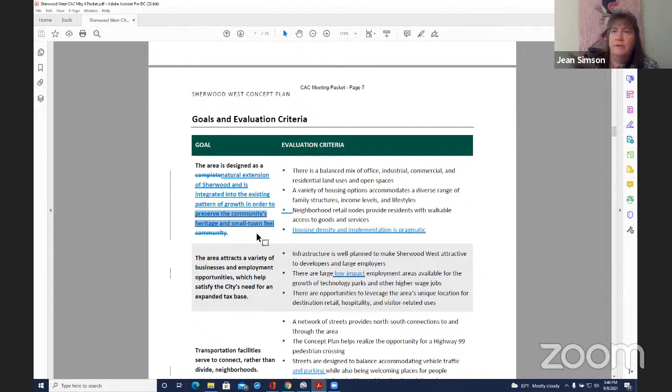And I'm going to circle back to you just for one part of that phrase, view corridors and separation of cities to make something Sherwood unique - our identity or Sherwood's identity unique. Correct, or something more intelligent than what I just put together on the fly. Right, I wouldn't need to see this again to approve it, my opinion. Your staff and crew do a great job of capturing what we're trying to say. But okay, one of the things that came out in our comprehensive plan update was how Sherwood's natural barriers and the separations allow us to be a unique community within the metro area. We're separated by those natural barriers, and preserving that's really important.

Okay. Kennedy, please. Yeah. Hey Joe, I think the vision statement and then the goals and objectives evaluation criteria kind of meets what we were discussing at our last meeting. Okay, thank you. Any other thoughts from anybody?

Not seeing any. Okay, so with the addition that we will find the appropriate phrasing and location for the view corridors and separation of cities to make Sherwood's identity unique as an add, do we have consensus to move this forward as the vision, goals and evaluation criteria? A hand up can do it, either electronic or. Okay. Seeing thumbs up and hands up, not seeing or hearing anything in objection. Okay, all right, then we have consensus on that.

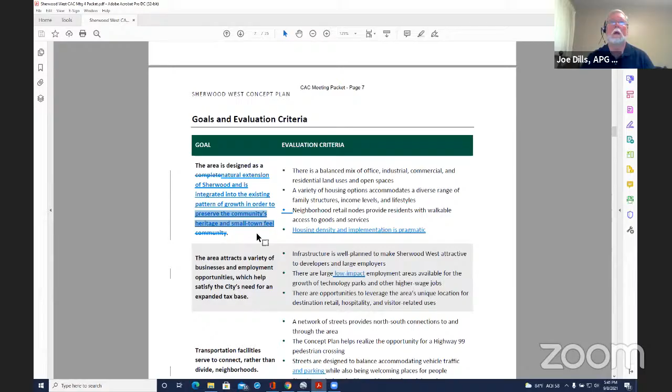And just a look ahead, we have a period of outreach to the community coming up in the next month and a half, and so this is part of the body of work that would be shared with everybody. Okay, very good, good job on that. Let's move ahead to the plan concepts, and bear with me while I scroll some pages.

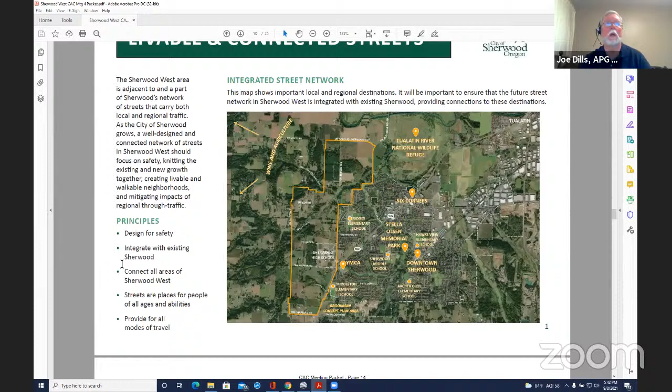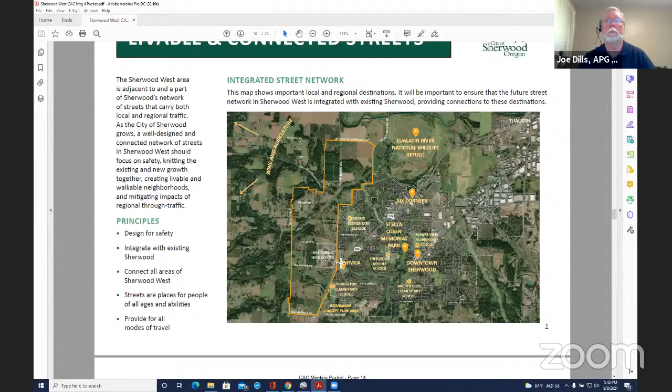So our first topic is livable and connected streets. This is basically the street concept plan. We made this first page in your packet, picking up on the thread of discussion last time, that it's really important that we integrate Sherwood West with Sherwood. Maybe 40 years out, you won't even know the difference between the two. It has really grown together with strong integration. So streets are part of that.

We started with making this map of destinations in the community that we're trying to connect and integrate with. It's not exhaustive - I'm sure there are more things we could add here, but that's the thinking behind this first page.

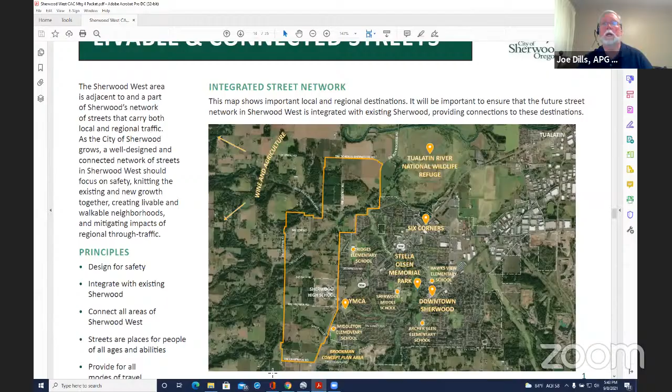So the next page is one of two options for the street plan. The street plan in our context is concept level - there will be refinements as the city moves ahead and adopts things into the comprehensive plan. That's a subsequent step, but we're trying to get it pointed in the right direction, the right balance of vision and implementation at this level. I wanted to walk you through the thinking on this map, and then we'll pause and take discussion area by area.

Starting with the north, our mixed employment discussions to date have identified the potential for a fairly robust area - 200 plus acres of potential mixed employment. To serve those lands, we've put in what I would call a very basic road system. West of Elwert, the connection down from Scholls-Sherwood, the connection over from Roy Rogers, segments the area into about 40-acre blocks.

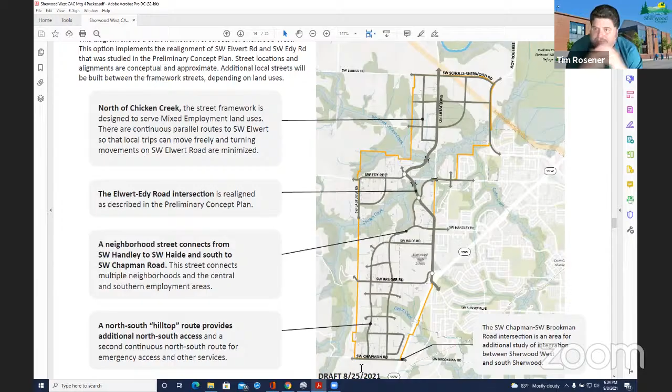My ideal is to keep that through traffic out of our neighborhoods. I think just looking at the terrain, I was wondering if that's possible. That's why I'm trying to figure out through terrain if we're setting ourselves up for that to be built or not. Thank you.

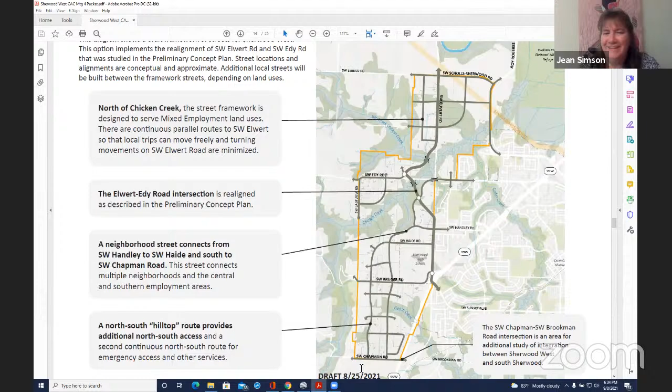Mayor, please. I was just curious about the thought of having a roundabout in another location up at Scholls-Sherwood and Lebeau, at that intersection of Elwert. Is that a possibility too, to keep that traffic flowing, or is that a problem? Carl, I'll ask you to add on, but I would say all options are on the table for up there because it's such a complicated situation that definitely needs some fixing, so a roundabout would be one of the candidates.

Do you agree, Carl? Yeah, I definitely agree. I know the county's had good success at locations like that. It's just that they haven't really come to a long-term solution at that point yet. They've done some short-term things, but there's definitely more thinking to be done there. But I would agree that a roundabout would be an option to consider there. Okay.

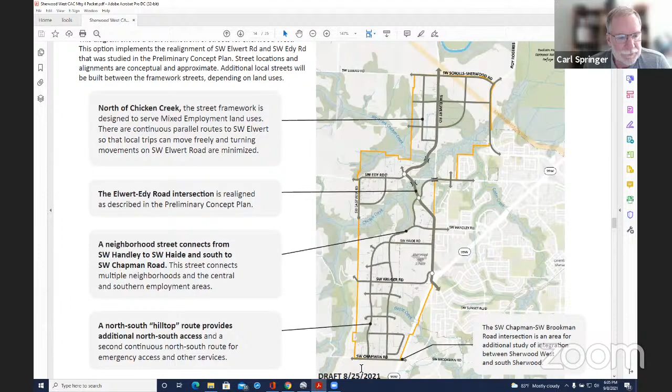Doug, did you have another comment? Yeah, it was more of a question—is the vision that, sorry I can't read it, East View Road, right on the left there that comes—is the vision that it would continue south, or is it just going to dead end there at Chicken Creek?

Our sense is that a dead end is probably the best choice. It would not really merit the crossing given the traffic flow, and the land goes back uphill pretty significantly on the south side of Chicken Creek.

Okay, so the area south of Chicken Creek can be well served by the Haide Kruger kind of framework down there. Yeah, it just feels like we're putting a lot of stress on the roundabout there at, well, it's not named, the realigned intersection of Edy and Elwert, where we have a roundabout, and then potentially even that. Anyway, yeah, I gotcha. Yeah, okay, great comments on this.

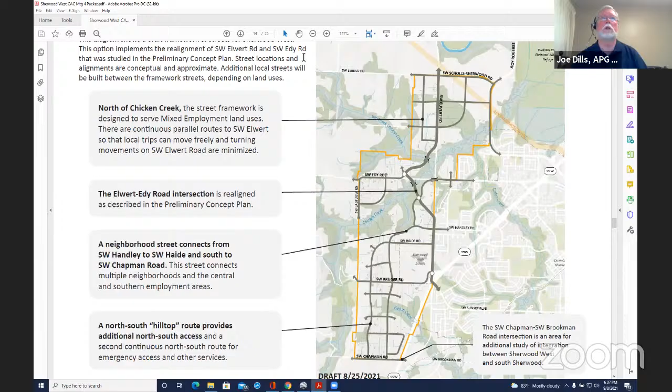Any last ones? Let me move ahead to the other option. There isn't much that's new on it, and I think you've sort of covered your own preference and thinking. But the other option is illustrated on this graphic. The local roads respond to it, and that's what it is—the rest of the system is basically the same.

Okay, let's go Mayor, and then Doug, if you have another one, we'll go back to you. So looking at this map, is the arrow that crosses over Elwert that looks like it's in the new industrial portion, is that Conselman, or what road is that going across there where it says West Fork Chicken Creek?

Let me dial in real quickly. West Fork of Chicken Creek. Yeah, that arrow right there, right where your cursor is now. Is that Conselman? I'm gonna need help on the road name. There is an existing right of way in that location. I believe it is, Mayor. Okay, thank you.

Doug, did you have a comment on this option? Only that I greatly prefer the first option. Okay, I'm seeing some head nods. Is that a pretty pervasive point of view of the committee? Yeah, okay. I think for purposes of sharing our work with the community, we'll continue to show both options, but we can certainly note that there's a preference towards option one at this point. Yeah, I would just really worry about safety in this option. Yep, yeah.

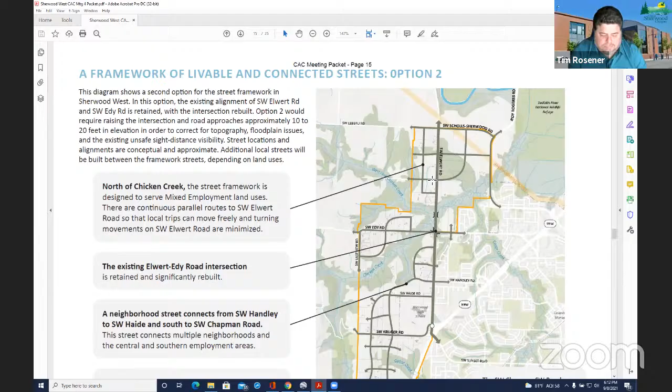Anyway, we captured that as an action item moving forward. Okay.

Okay, to move on to our next topic, the Elwert design. Oh, can I mention one more thing, Joe?

Yes. This came out of our TAC meeting this afternoon regarding roadway design. We talked about this before at our last meeting, that when we design these roadways in these natural areas, we want to be really concerned with how they function with that system. So maybe we have a large box culvert of some type that creates an access way for animals, and also maybe people through the trail system.

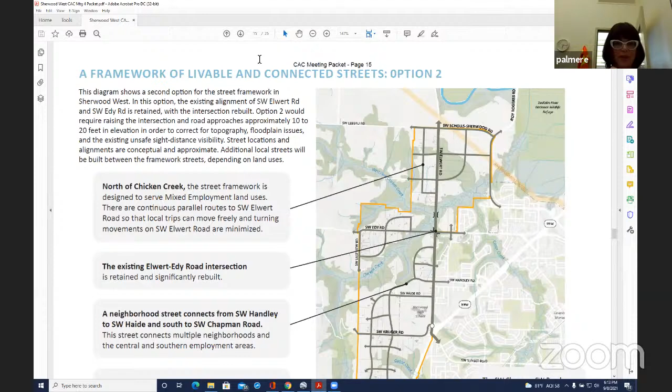Yeah, and sometimes a bridge is about the same cost as a large box culvert, and it actually provides a place for people to go and view the creek, and it's kind of a mini destination.

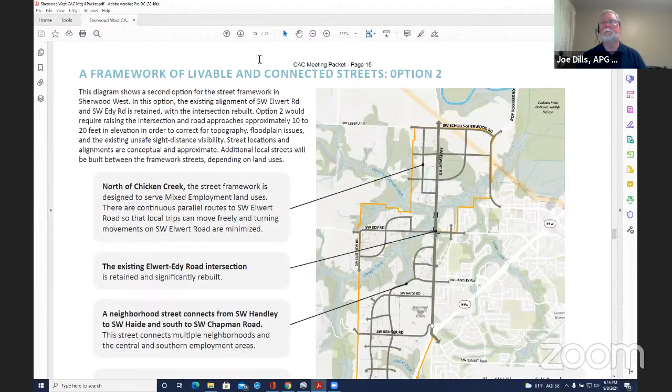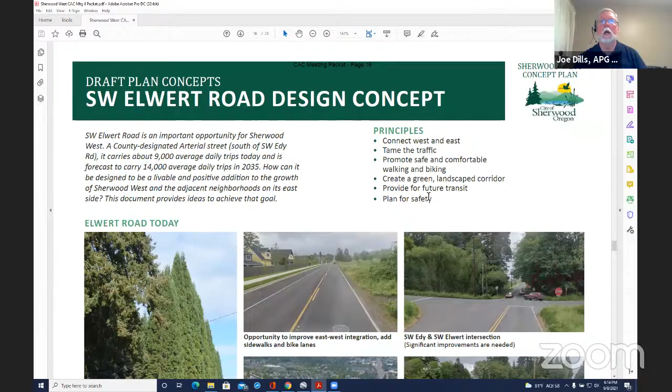Okay, moving on to another transportation topic. We have put some thought into the design concepts for Elwert, and the work here started with just some reminders on the existing setting that is out there. So that's what this page of photos is all about.

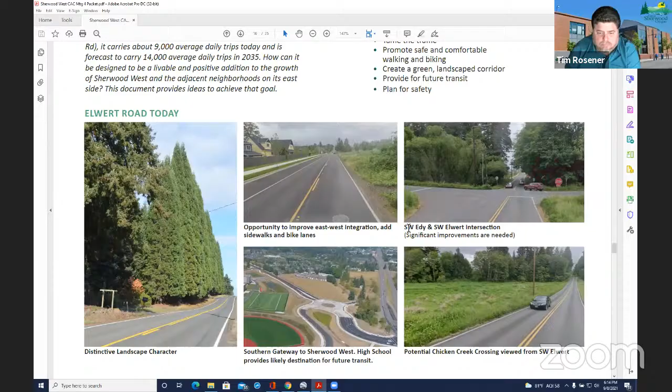Particularly at the CAC level, but really in multiple conversations, there have been references to Sunset as an example of a fairly successful street. I mean, Woodhaven and surrounding areas are successful on many levels, but what we've heard is that it's pleasant, that people feel safe about their kids navigating this area, whether it's near Sunset or other streets.

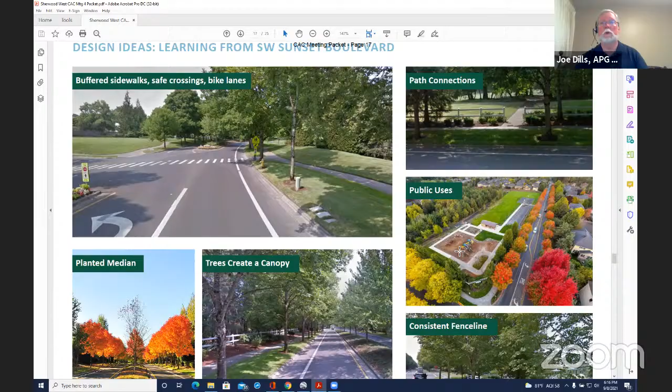The path connections are good. Clearly the plantings and landscaping are very high quality with the planted median. My own observation is that the neighborhood park on the north side of Sunset is really a beautiful edge along that portion of the street. And the three-rail wood fence is kind of a signature, consistent element.

So let me stop there and pose the question, inviting your knowledge of Sunset. What do you agree? Is it a good, successful model? What are the parts that make it so? And is there maybe another precedent that we want to learn from? Let's just do maybe 5 minutes of discussion on that.

It sure shows up nice in the photographs, I'll say that. There's not much to say because it's beautiful.

Yeah. Kennedy, let's start with you. Yeah, so I'll jump in. I think that's a great comparative. I can't tell you how many people from out of the area who I know, who come through Sunset, absolutely love it. So I would say that's a great benchmark or parallel for us on that.

Okay, Brian? Yeah, I would agree for sure. I think a lot of that can be emulated and mirrored on the west side. Especially with the tree-lined streets and how they reflect the seasons, that's something I always look forward to. You always know what season it is just by looking up at the tree leaves.

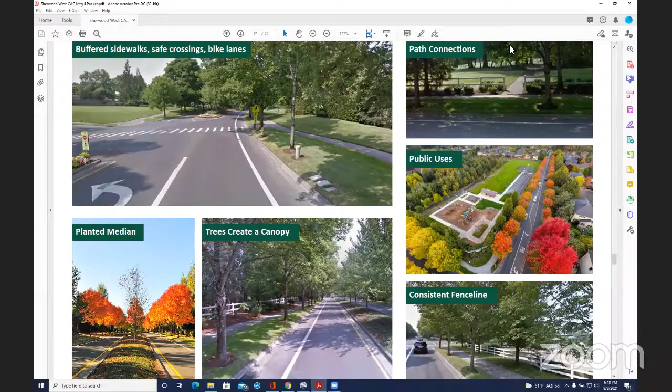Okay, Emily? Yeah, I just wanted to say that the grass strip along the street and the distance of the sidewalk from the street makes it so inviting for all, for families and walking. You're never worried about a car coming too fast around a corner. That extra buffer is just really fantastic. It's interesting that the grass strip is actually slightly mounded from curb to sidewalk, which gives you that extra psychological comfort.

Okay, any others before we move on to looking at Sunset or Elwert itself? Brian has his hand up. Brian, another thought? I apologize, I forgot to lower my hand. No worries.

All the comments everyone made were just absolutely spot on. I think it's important that as we grow the west side of Sherwood, it has a similar look and feel to Sunset in this area. So I agree with all those comments. One thing I would add is when we look at all the right of way we allocate for these roads, we need to be thinking longer term even than that.

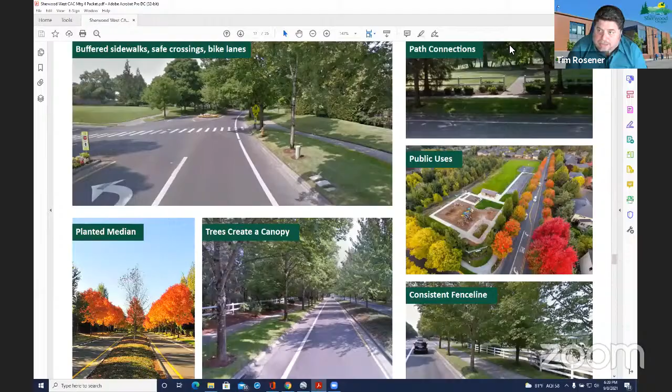So we don't have what's going to happen here on Roy Rogers near the intersection of Safeway, where that's a county road and they're taking it to 4 lanes. We're going to lose a lot of that because there's not enough right of way to the private properties. So as we think about the zoning, we need to make sure we're allowing for enough right of way for future growth if it needs to go to 4 lanes, so we don't lose that character.

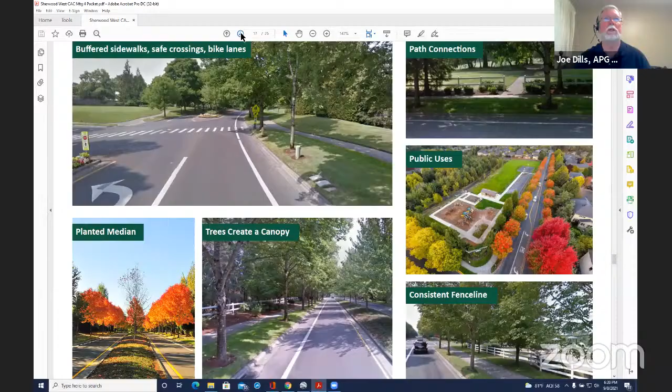Okay, with all of that, let's move ahead to a couple design ideas for Elwert itself. How might we apply some of these things we like? Let me make this a little bit smaller. There we go.

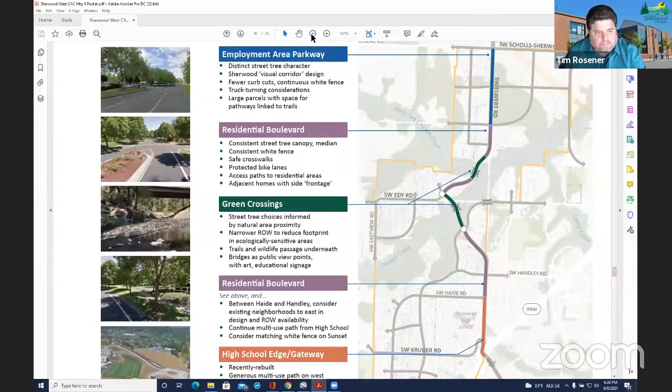So what we've done is picked up on those ideas, and it seemed to imply a segmentation of Elwert from Highway 99 all the way up to Scholls-Sherwood. Even though there are distinctive characters in those segments, the continuity from one end to the other would be part of the design idea, but it varies a bit in its context.

So I'll start from south and go north. At the high school end, the west edge of the street is built, the east edge needs to be completed. But what we have is the beginning of a multi-use path in that vicinity that can be continued north.

Then from Haide to the roundabout, we've labeled what we've called a residential boulevard. That section would be something like the imagery we just saw for Sunset — probably the closest comparable of these sections — as highly pedestrian oriented as we can make it, still carrying its function of moving traffic, but with pedestrian safety as a priority.

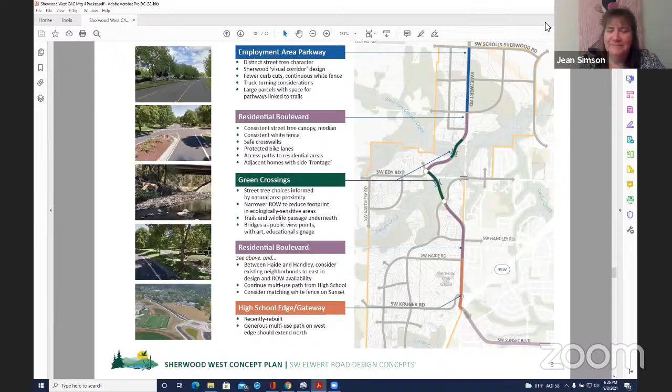That means we get to continue to use all those beautiful pictures of Sunset.

Okay, well, perfectly fine to move on then if we want to go to our next topic. Okay.

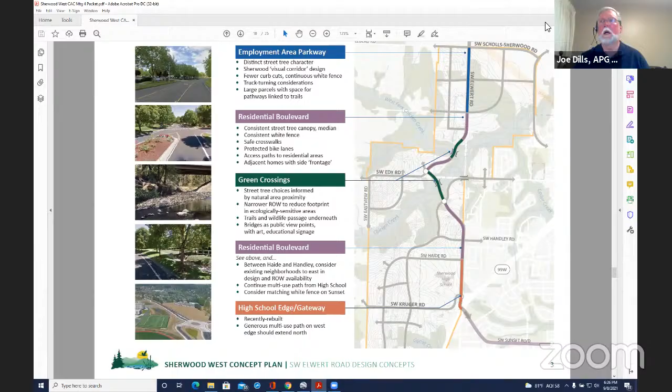So for this next one—sorry, I do have another topic about transport. It wasn't about Elwert in general, but it was about transportation and streets. Yes, go ahead please.

One of the challenges we're seeing in some of our existing neighborhoods is parking, street parking in particular. The street standard either doesn't allow parking on both sides, or it's one side only, or it's both sides but not quite wide enough. So you have this slalom effect where everybody has to wait down the block for the car coming at you to make it through, and then you can take your turn.

It feels like there's an opportunity, as we go into Sherwood West on these other streets not named Elwert, that we make sure we account for right-sizing those roads given HB 2001's potential ramifications, and given how our parking situation is being stressed and will continue to be stressed even more. We want to make sure we account for that in those road designs.

Okay, thank you, that's exactly what I was going to say. That was the big bullet point I was going to add to great neighborhoods—adequate parking, both on-street and off-street. We will potentially, with HB 2001, only be allowed to look at on-street parking as a criteria in some instances.

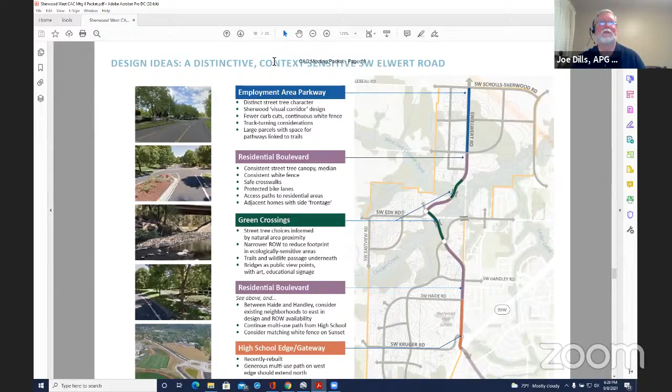I'm aware, yeah. We've just finished the package for Wilsonville, so you know how painfully awkward it's going to be.

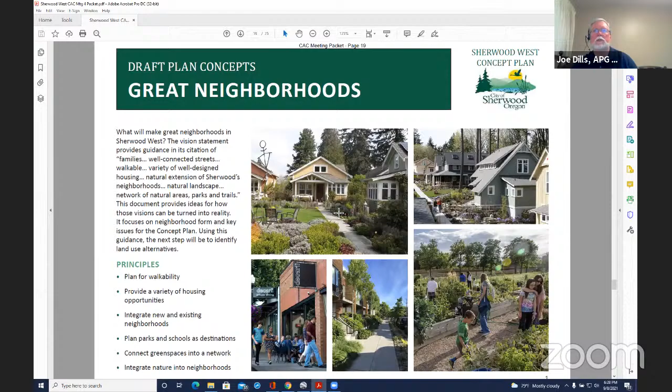Okay, so let's then move on to great neighborhoods. Not only is that a good segue, but your comment earlier, Jean, about walkable neighborhoods—we actually put together this great neighborhoods material in tandem with the street plan, going back and forth and doing them together. So page one, like the other documents, is introductory about principles and the opportunity for great neighborhoods as an extension of Sherwood's neighborhoods. Let's go to the first diagram.

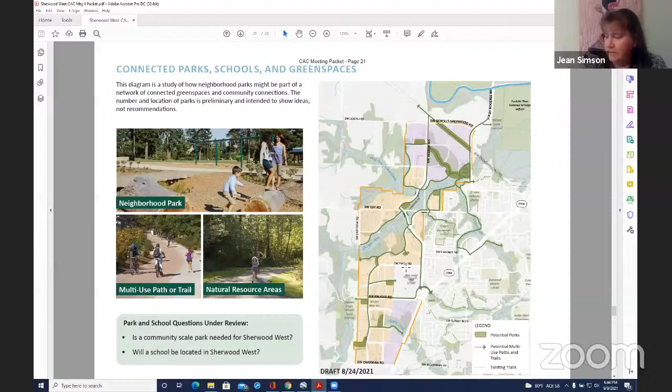I'm completely changing topics, I just don't want to lose this. Is the document we're looking at going to be presented and carried forward through the process, specifically the first page that talks about great neighborhoods and the principles on there? I think it's your previous page.

Yes. I want to add, I think one of the principles we hear at every meeting we have is that adequate parking has to be a principle and a priority when we go forward. So if we don't add it in the section before, I was thinking this was an appropriate place to make sure our neighborhoods have adequate parking.

Okay. Yeah, and we'll be doing a few tune-ups to these documents as we share them to reflect your comments here, but basically we're intending to carry these forward and share them with the community.

Emily: At the last meeting it was brought up about the pipeline, and I didn't see that indicated anywhere on the maps at this point. I didn't know when that was going to be on there and how that would affect any of this. We have mapped it and looked at it, but we didn't include it on these actual drawings. I frankly have a note to myself now to circle back to that and make sure we're okay with all these various diagrams. We haven't done a comprehensive look at that, but we started with it before we drew each of these. So thank you for the reminder.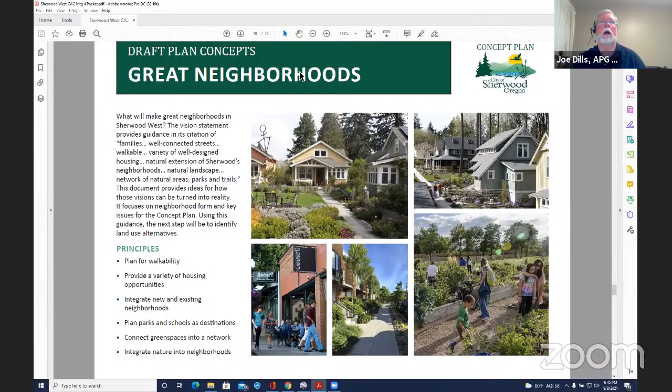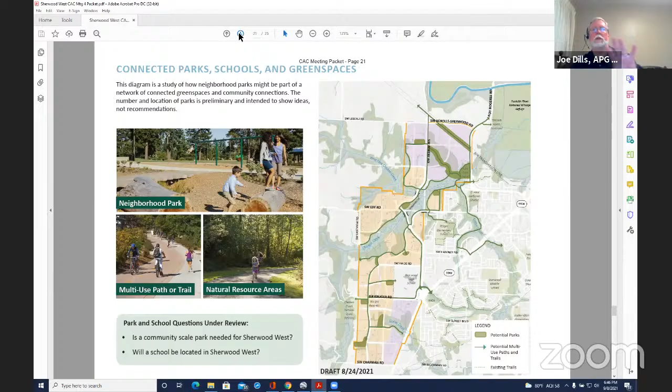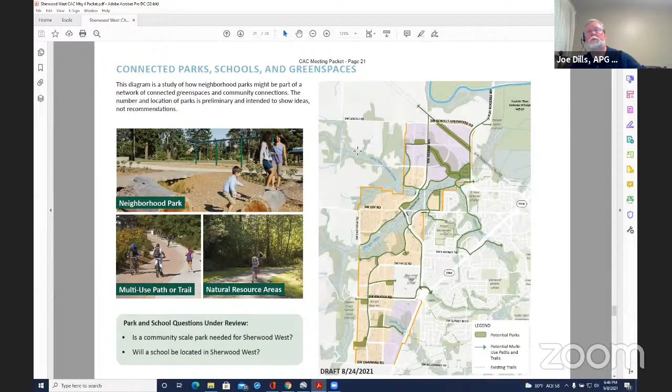And our mode between now and when we meet again - it's either late October or November - we'll bring back options for how we mix these various residential types into the plan. So my question for this discussion is, are there any comments you have design-wise or otherwise about the housing imagery and housing types we're thinking about for Sherwood West?

Jean, let's start with you and then we'll go to Doug. Has Metro weighed in, or I don't know if DLCD or whoever would be looking at this plan, at what our overall density requirements are going to be for the area?

Erica? So Metro hasn't weighed in on the overall density of this plan. In the last go around in the legislative ask in 2018, when those concept plans came into Metro, they just automatically used the density that was actually proposed in those plans for how those developments move forward. So that was Hillsboro, River Terrace, and whatnot. Do you know what those densities were? I don't know off the top of my head, but I can definitely go back and find that information and put it out to the committee.